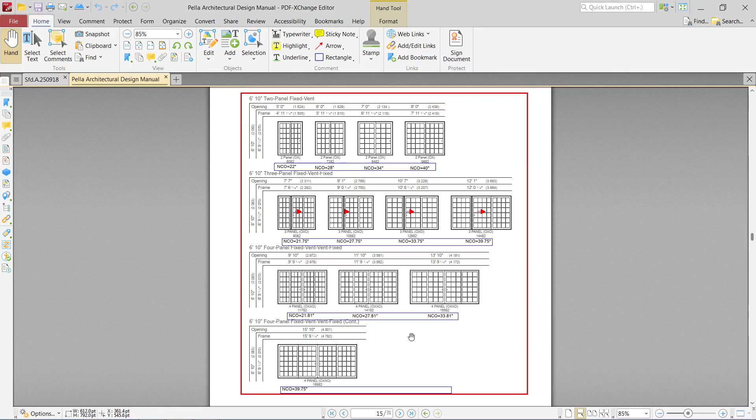So I ran with a 3-panel door, but one of the first things I discovered when I started trying to put the drawings together is that we weren't going to be able to support this end of that big ridge beam the way we were in the past, because in the past we had an attic to go into and we were building a new wall and etc. Now it has to come into this existing second floor wall, and then its bearing has to come down through here, because I tested it and it can't bear on just a couple joists up there.

That point load of about 5,000 has to be carried all the way down to the header across the new doorway, presumably if that doorway is put in, and I can't imagine it's not. So when that doorway is cut, you have to cut wider on each side by 4 inches or so that you can put in 3.5-inch blocking for these beams.

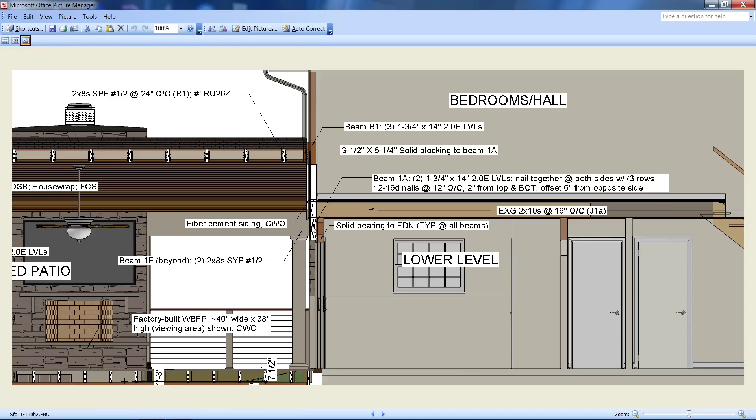Now originally I was showing this as 2 14s, but when I began to see this alignment here, I wanted to hopefully use it. I'm using the shorter Pella door, which is only 6 foot 9.5 inches tall. And so 2 14s or 3 11s, it's a little bit more expensive to use 3 11 1/4s, but that's what I did.

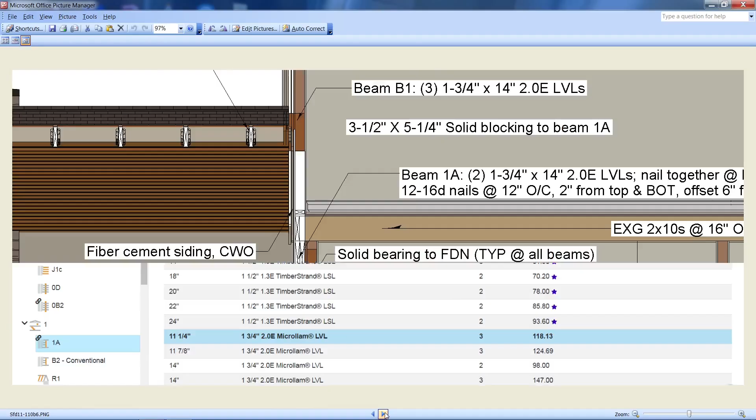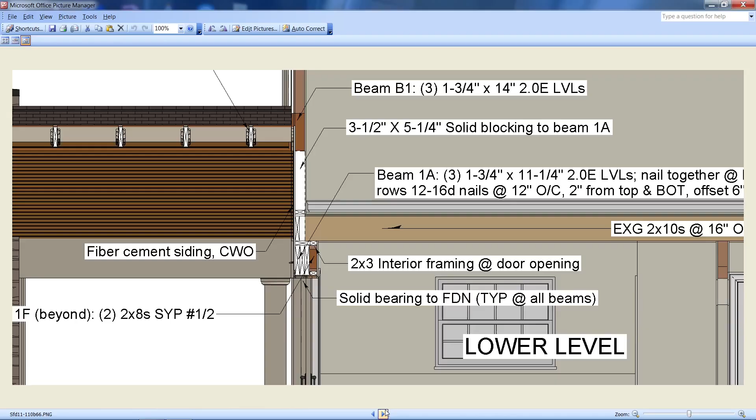I shifted those to 3 11 1/4s, and those will go out, and then outside that door gets cased on the outside as well, because it doesn't fit back in there. I mean, you might be able to do any number of creative things in terms of how to accommodate that out there. But this is how I did it.

You're probably not going to have this brick across here because you have to put a new lintel in. It doesn't matter, because we need our beam in this region here where this brick is. So one way or another, that has to be accommodated, and that is a start, but we need that framed all the way down so that we can put those 3 11 1/4s in there.

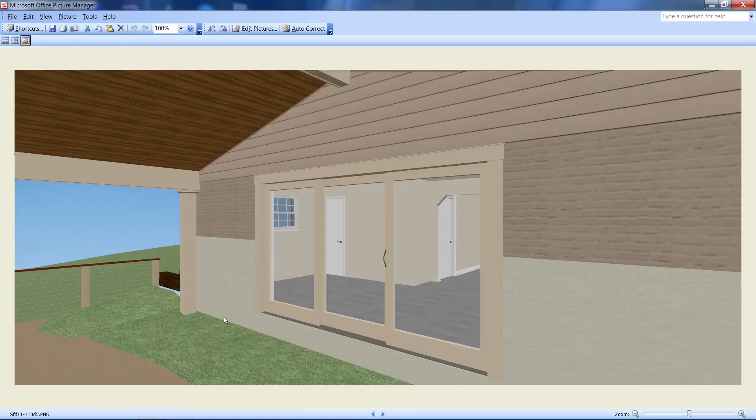Next, this is when I was still thinking I was going to be able to lower this down 2 stairs. I had just started on this without knowing what was going to happen, and I put this bit here together first, but then I began to think about lowering this and recognized it just wasn't going to be possible since we were no longer coming out southward 10 feet. And even here, I've scraped this ground away, and I'm not sure you can even do that. Yeah, you can see I've scraped that ground away.

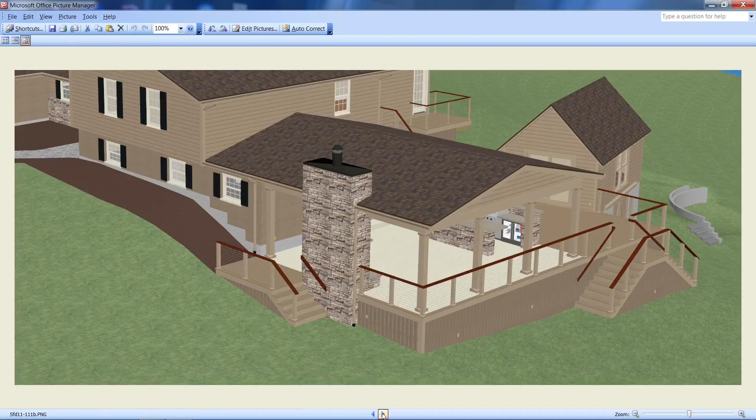Right now, over by the door, this ground is up level with the door. So even to put this deck level with the door, some of that ground needs scraped away. Or you can put your framing in and then refill it if you wanted to. It's all ground contact lumber. And that was where we were the last time. Step downs, 7.5, 2 step downs. I'm just looking at this right here. This is your floor surface in here.

And if the dirt was up to that surface, and it is at the back wall right now, I don't have a lot of reason to expect that they would build that rear foundation wall any deeper than they needed to. I'm showing it 2'8", but they might have only built the bare minimum 3 courses back here. So if somebody wants to check that, it would give you a good heads up on what's going to happen.

But right away, regardless of that, I knew that we're not going to be able to come down that far. If you wanted to come down those 2 steps, you would have to undercut that rear foundation wall and put in some sort of piering like this at some specified interval.

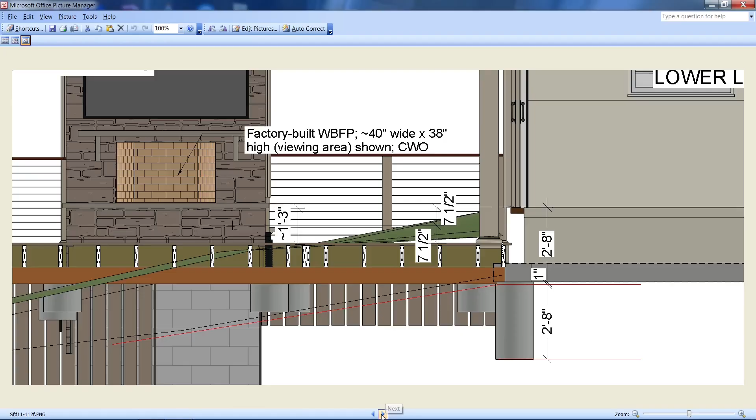And here was the plan last time when the railing was still outside. And this was a good idea and a sensible one, of course, to move that inside. And I really liked that. And I didn't like that much. I mean, this was tolerable when it was that, but I still was not thrilled about it. This does make that skirting easier. Okay, so we don't have to fasten that skirting to a concrete wall.

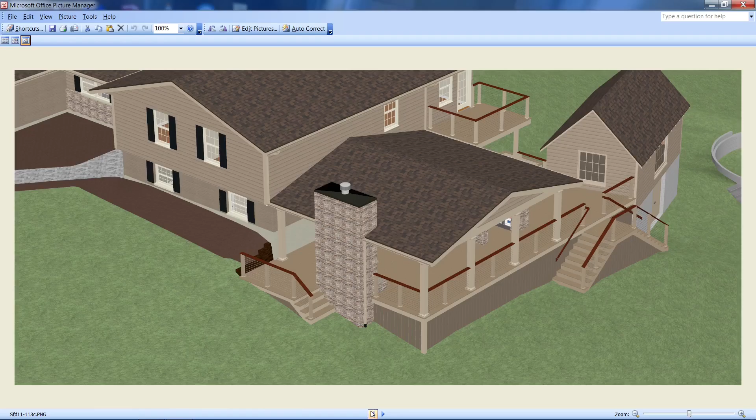And the railings, I've left these like this. And one thing, you might have to come out a little further than this because they want at least an inch, I think, maybe even a little bit more than that, behind that railing for this obstruction, maybe a couple deck boards. These are just those hollow aluminum or stainless steel tubes with the fasteners going through it.

Now all of this railing that I'm showing, you can either put those newels together yourselves with framing coming up through here with 4x4 and a sleeve, but this is a 5/4 by 6 on top of it, or you can get something from a manufacturer to do all that.

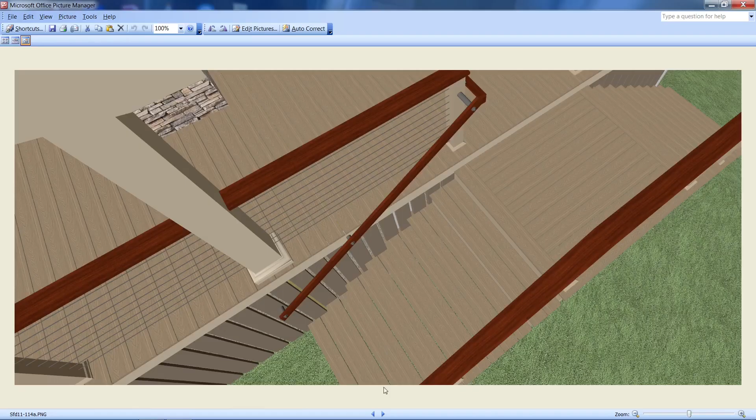Okay, so at that point, once I had that deck raised up the extra 2 risers that it absolutely needed to go up, this started to look like this. And then I went down a whole path, and the construction drawings are based on what I ended up with at the end of all of these slides, because I followed a number of pathways. And I guess the first thing I did though is this is too far. This is 5.5, almost 6 foot, which is too far to stretch those cable rails.

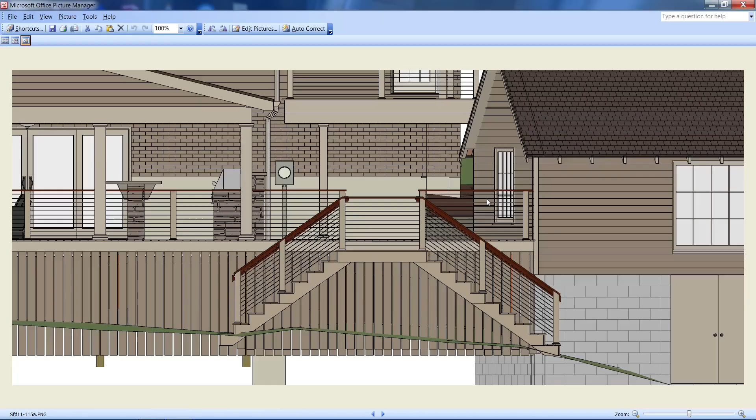So the first thing I did, I moved that back to the west, so we were able to put an extra newel in here and get that where it needed to be to hold that. And this one now is the same distance from that, so I kind of like that. We still have this column here, and that's what I began to mess around with, I believe, as I went forward.

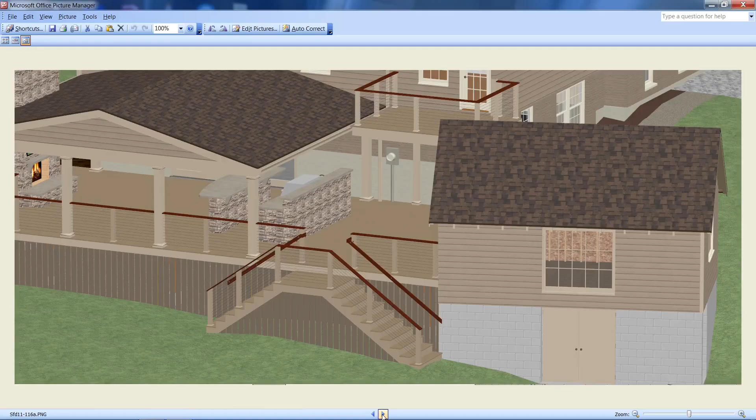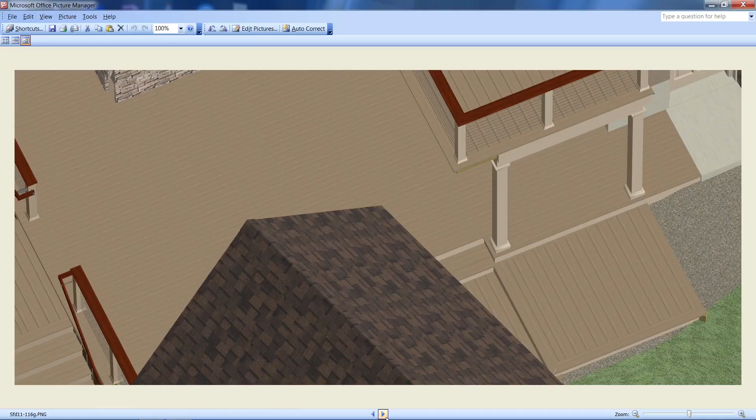Leaving that alone for a minute though, this was how it was the last time. This is a 2nd floor deck, and this is how I had this, where this was a wall or a railing across here. And maybe that still makes the best sense, but I did what I could to make this a different sort of situation than that. So you step down from either of these places then, and I'm not sure how this is all finished out in the plans. It's finished a little different than that.

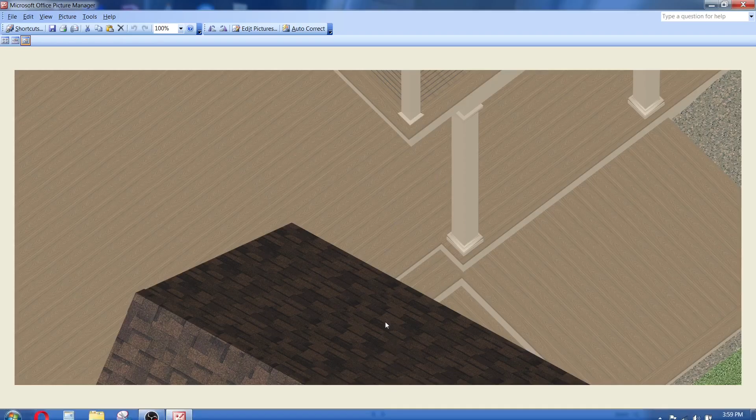The main thing is this column has to stay, it's necessary, as does that one there. But these ones on this side don't necessarily have to stay there. And that's the beamwork now. And I tested what it would take to just bring that beam across so that we could get rid of that front column at least. That's where I began, is getting rid of that front column.

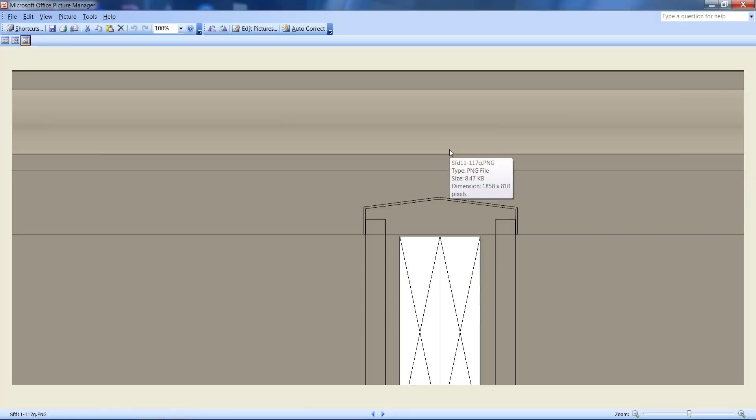And where it comes across there, there's this little detail of flashing. It's only about 8 inches long, and it comes in under the gutter and over whatever that beam ends up going over to there. However, this beam can only be 9¼ inches tall max, because it begins to intrude on the gutter, and you can see that the roof can't go up any further. So no matter what happens, that has to be a maximum of 9¼ high. It doesn't matter that you can move this deck up. The problem is right here, getting under this and attaching to this.

But I designed a couple things with that 9¼ inch height, the only way I was able to do that with regular conventional lumber and not LVLs. When you go to an LVL, you could probably just use standard LVLs because there's just so little exposure, but you would have to somehow flash off the top of that underneath those joists. And that's probably possible too. But otherwise, you could use an exterior LVL, which they make.

But I tried to keep everything just using conventional lumber, and that means a couple 2x10s, which meant I had to reduce both how big this deck projected forward and what the loading was on that. Now if you use the LVLs, I reduced it down, but if you wanted it larger, it can go back up if you go to the LVLs for these beams that carry across. And that's if you agree with this idea of eliminating these extra columns here on the interior.

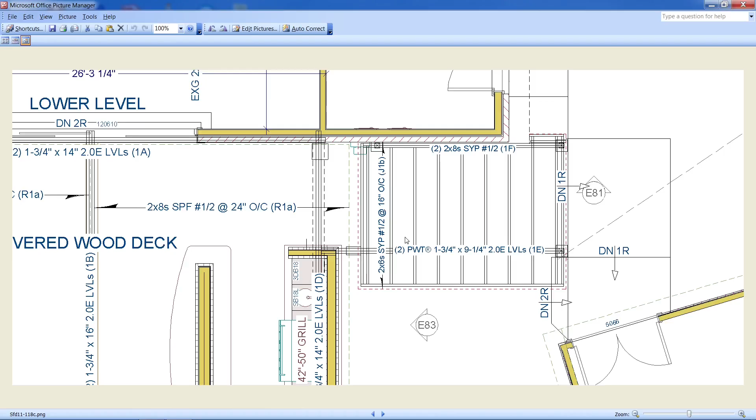These are the pressure treated. If I load this at 40 pounds per square foot, and I have to say if you have stairs coming down here, then it will be necessary to have this rated at 40 pounds per square foot, is my guess, because it's accessible like that. If it's inaccessible, I was pretty sure I can get away with just having the loading at 30 pounds per square foot. And so that's what I did in order to get where I went, which was a couple 2x8s on each side of those.

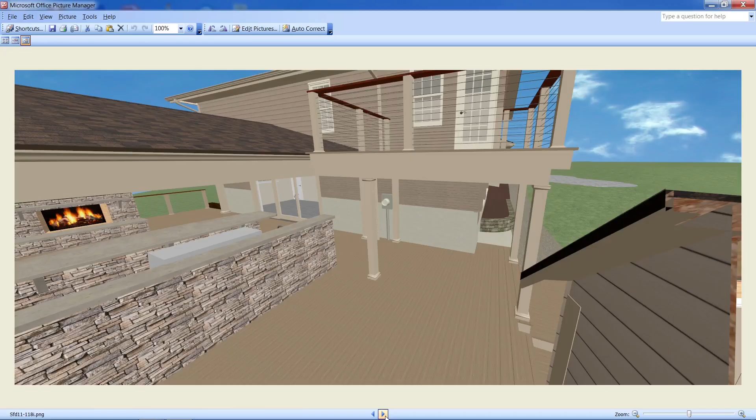This is how, when I just took out the front one and just had that going through, and I don't know if that's bothersome or not. I felt like the column was a little more bothersome than this. Particularly, as I said, I'll try not to forget various things I was thinking of when I went through this. So there they both are, this one and that one. And I knew I could get rid of that front one with this here, and I can get rid of the back one as well.

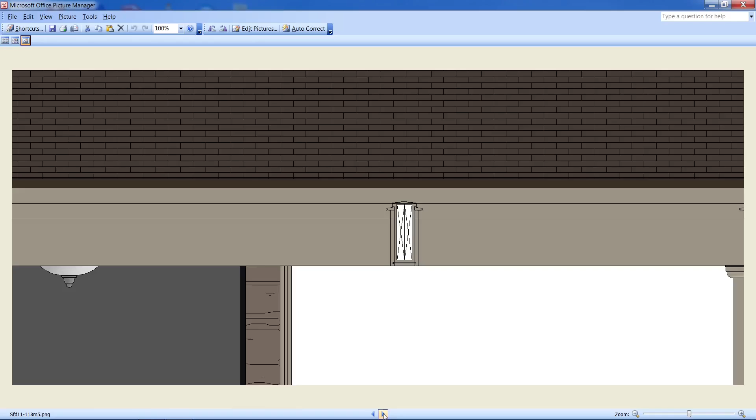Looking from this side, taking some of these out, and then you can see the overhang here is that big 2-foot overhang. And that was fine when we had our own columns at this end. But if we want to do this where we hang this column on this beam here, then that overhang can't be that large, or we're going to use LVLs. But that takes out both those close ones and just has two big beams coming back to the main LVL. And that's the detail there, and you can see it was a little too tall to fit the gutter, so some special arrangements had to be made there.

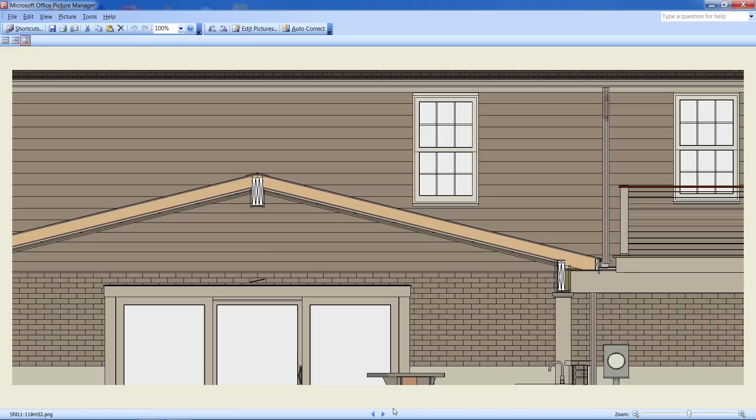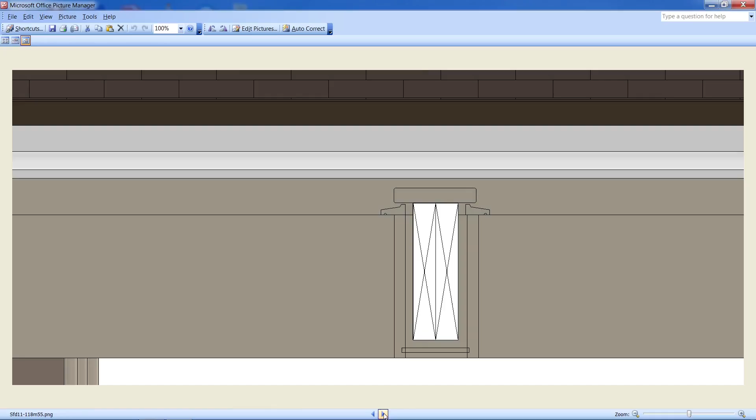This is 11¼ inch fascia board here, and it just has to get cut out down through here to allow for this flashing, etc. And I kind of did something like this. This is the gutter up here, I believe. Yeah. This was one of the flashing details I worked out for that little 8-inch section, just standard drip edge, and one by and then flashing on top of it. But you can almost just use a decking board for that matter. You can almost see it here, right here. And that's that drip edge and decking board.

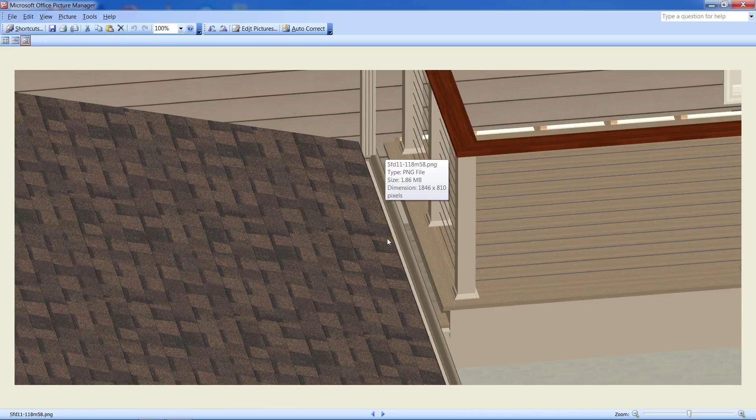Now, this is kind of a game of inches, because this downspout has to come down from that second floor gutter here, and then when that beam at the back comes through, the downspout that comes off of this gutter here has to get to the left to miss that gas or that electric meter that's down below. But there's plenty of room for that to be done in behind this bit here.

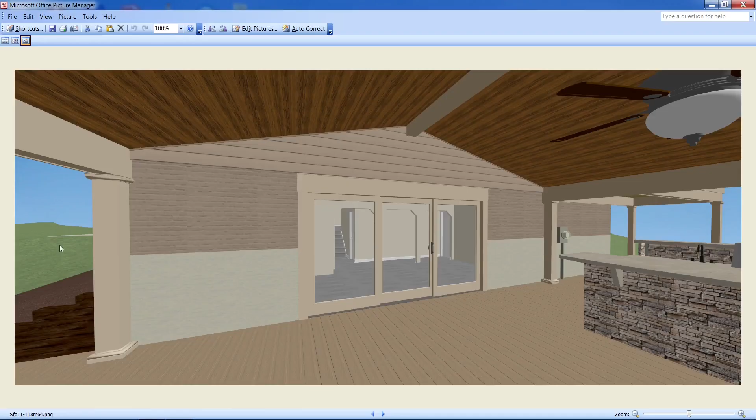And those two could be totally eliminated. They're not, because these beams here that are carrying, I have those penetrating into the house and bearing on the house framing inside. So these ones don't need to be there, but then you lose some of your symmetry looking at the fireplace for sure.

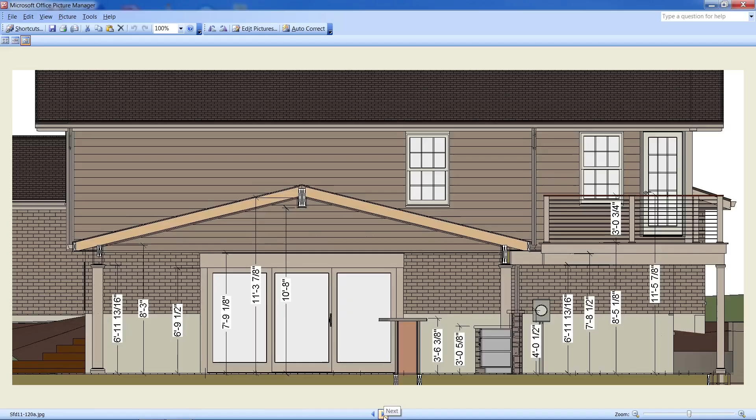Out here I looked at this and I knew I was going to have to build regular foundation for this bit here. I didn't think there was going to be a way to do that with just wood framing all the way down through the foundation. So that changed around and I put a regular 8-inch CMU foundation. You could probably build it out of 6-inch CMU, but I built it out of 8. Well, the mud sill plus the CMU wall came up to the bottom of the new deck floor joists, and those floor joists went across there. This was just some dimensions for you to reference at some point. Some of that's going to be in the drawing anyway.

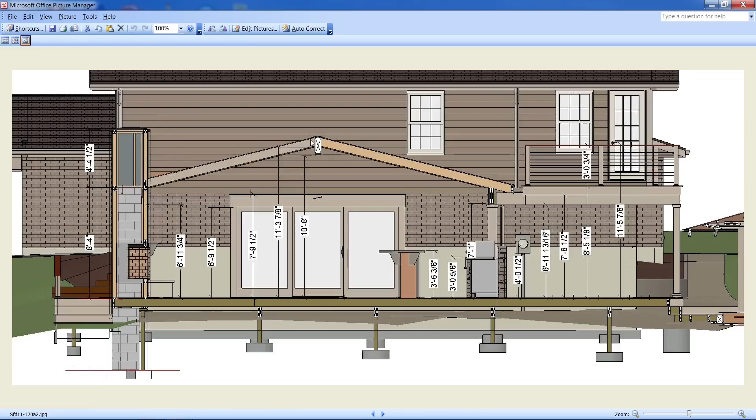Where this chimney is, I've built this chimney in 2 stages. Maybe you put plywood down first or whatever, but I have the framing built right on the deck framing, and then coming up 8'4", and you really can't come up 8'4½", so you got to cut the 2x4s. Coming up 8'4", and then building the second section 4'4½" on top of that, with these studs just coming down between these rafters. So that's that area there. And you see what I finally ended up doing is using a big lintel on this door here, with the new Hardie siding coming down to the top of that drip edge on that.

Because the door can't go any taller, but we definitely have to cover up to that siding. And this had been a tall 14 or 16-inch piece of like MiraTEC up here, but if you were using more conventional sizes, what I end up showing is a 1x12 and a 5/4 by 4.

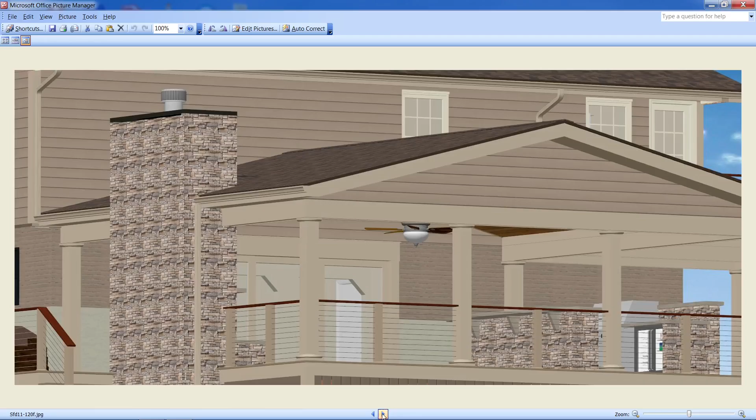And this is the view from that side. I guess we go through a few things here. I like these. This is kind of what the step down would be. I think is the best we're going to get with that. Then I continue to carry this through, and there's my other looks. Hopefully this is the right photograph numbers.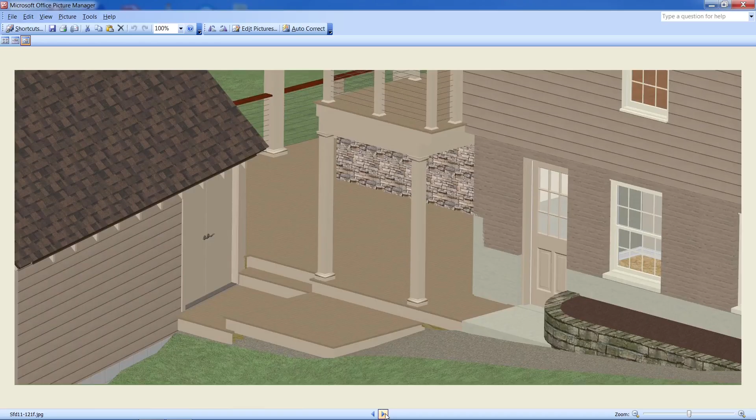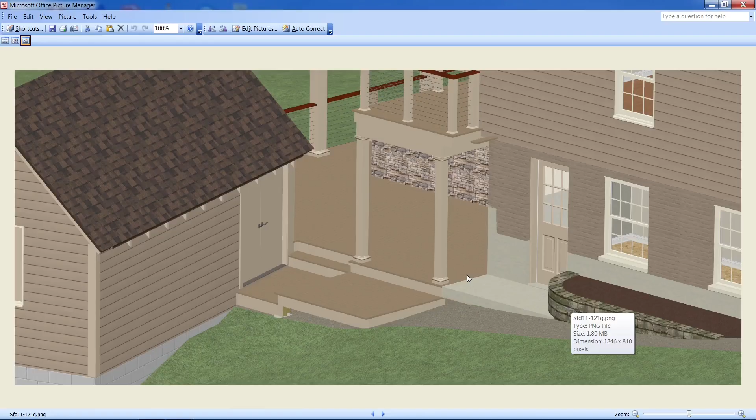So over here, you know, this grade comes up so high that I just have those piers coming up, and the framing is bearing directly on the piers. And you can see what's happening there. So that's when I just bring that concrete sidewalk all the way forward to that decking. There's how I put together the framing for that.

This is kind of the roof beams. These are the flanking beams. These are just the 2x8 pairs here, and the LVLs at the top, and the big 2 14-inch LVLs here. This middle one, which has a post that goes up, or framing that goes up to support this, same at this end. This middle one I have going to the outside of that 4x4 for full 3.5 inches bearing.

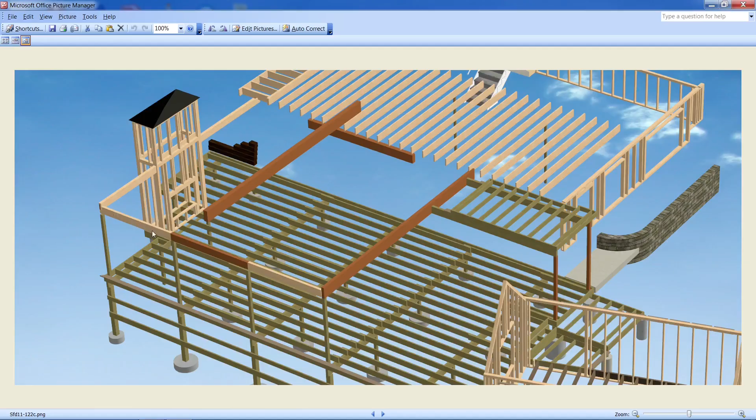And then these things here are only carrying nothingness, and so those could be box beams, or I show them hanging with concealed flange hangers at each end on either this or the column, as far as that goes. On this end here with these 2x8s, that column would actually come all the way up to the bottom of the 2x8s that go that way, and then these 2x10s are suspended on that interface.

And the same thing happens with, I changed all those upper columns from 6x6 to 4x4, so that we can just attach those to each of our beams, or just get an attachment to that.

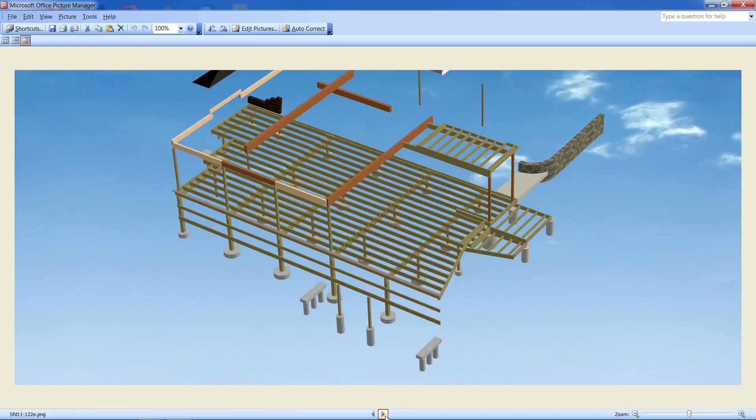These are horizontals. I show a 2x8 horizontal and a 2x6 horizontal to carry that vertical skirting, if that's what you end up doing. But there's how many holes you have. I suppose these could be a couple 12s instead of 3 9s. And there were so many different sizes I had no choice but to just label them on the plan.

And all the ones back against the wall, this is a 12 at the end, but all these ones at the back are 16s. And then most of the others are 24s. Except these two middle ones down here are 28s, and I still haven't figured out how to make that any less than that.

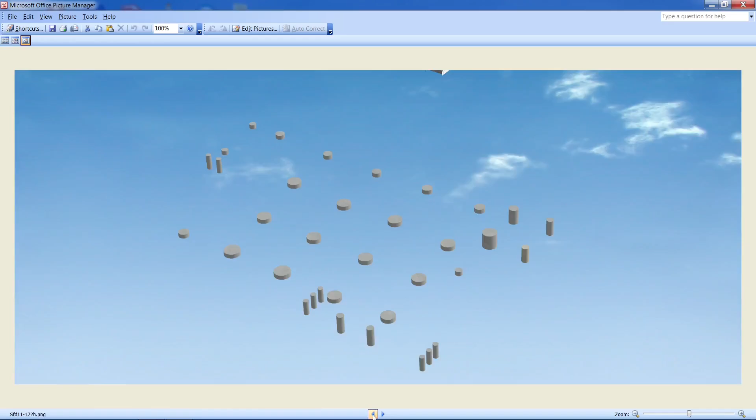And I'm not sure what this file was. I'll probably put that together and see what it is and include it. If not, though, I wanted to show you a few other things.

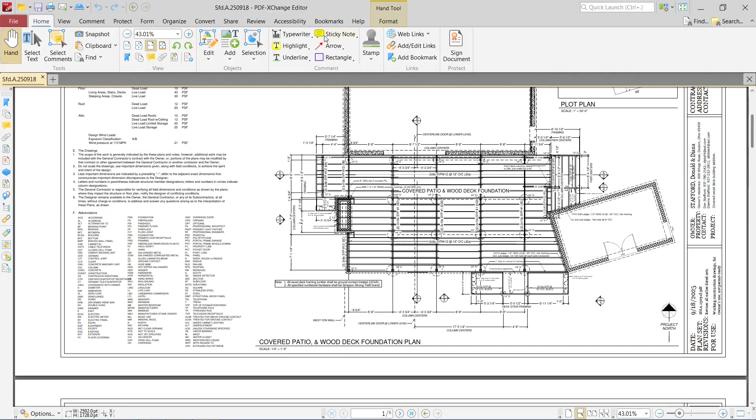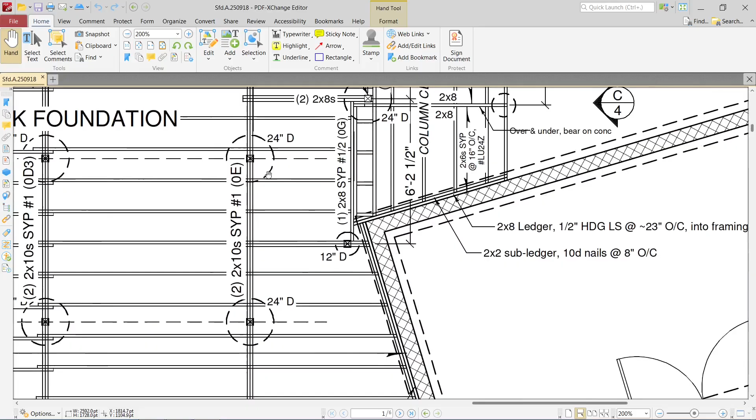I wanted to say that I left this all the same, but it is rather a game of inches here, and this is going to have to be mapped out for sure so that we know this is true, because you can see how close it is down here. And I suppose it's not the end of the world if it's this way or that way, but it's just something to keep in mind. The same thing applies for how it all actually comes together at the corner with this stair, because we can't be absolutely positive of that yet.

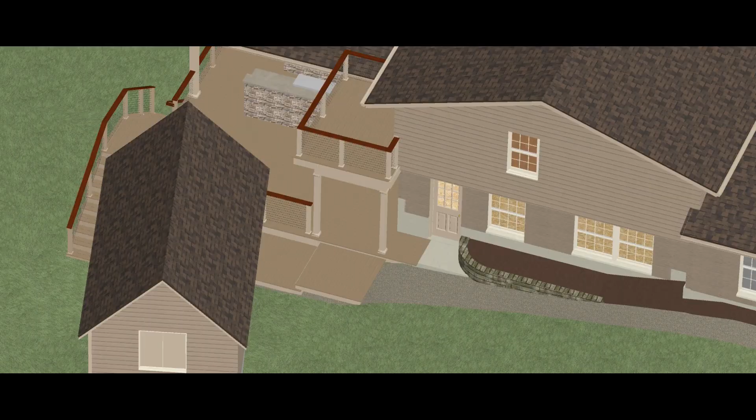And this was apparently a turnaround that I had made when all of those little columns were still in place. And they are fine to me to be staying in place when I look at them this way as well. And maybe there'll be a short turnaround with those gone.

One quick thing I want to say that occurred to me during making this film, I think I'd be remiss if I didn't say so, is with regard to this door. Now that this space has become less high, I'd like to have that door as high as possible, but of course we're limited by this header. But now that we're cutting this wall, so we have bearing all the way over and all through the whole thickness of that 8-inch wall, it is possible to move that header up into the wall.

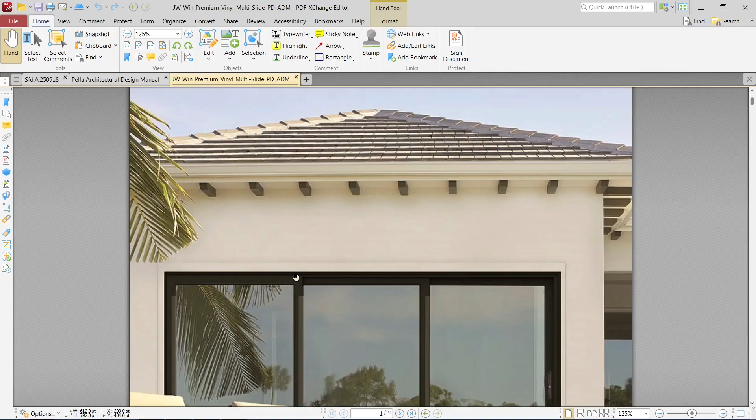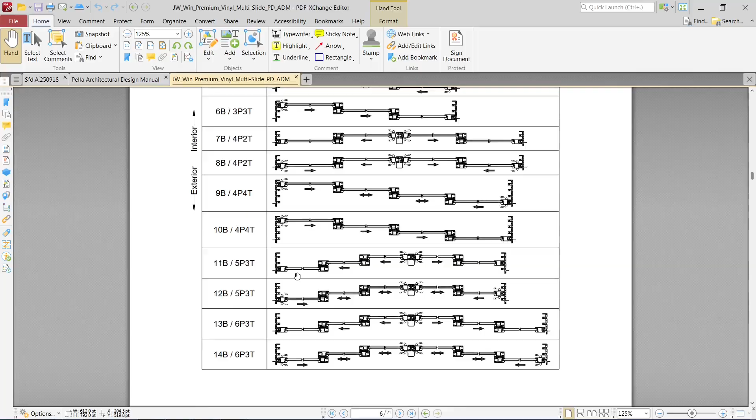Now this was Pella's standard size, but that led me to look at some other sizing alternatives. Pella makes a 6'10" and then an 8 foot, and I was hoping somebody made a 90, and I think some of these people just make whatever size you want. And you can see that there's a whole variety of different things that can be done with that opening, including folding doors and all of this sort of thing.

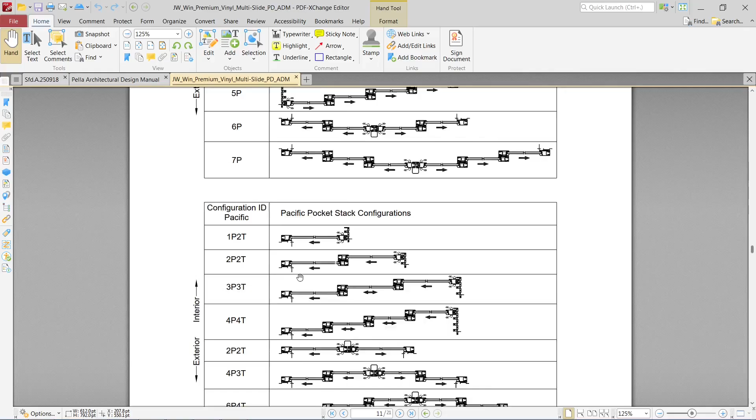See if they have any. They're just various pocket and stack configurations and sliding back like this, and we have the whole thickness of that wall to work with. So that header that has to go over there to hold up the end of this beam can go up into the wall, and it was already sized to hold these as well. So where it's located doesn't matter. So I have it pushed up into the wall.

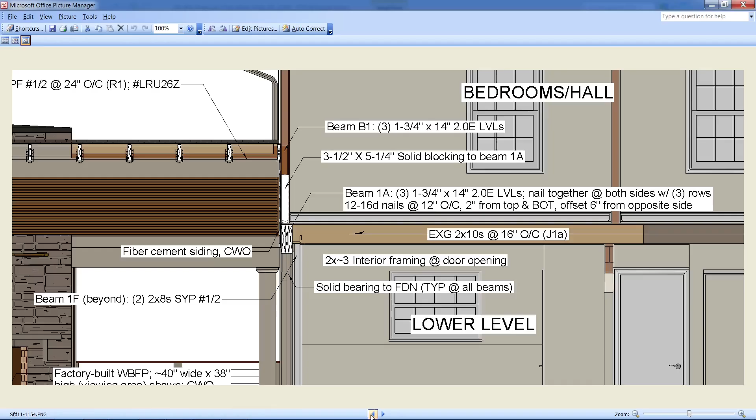And really, a person may as well do that if they can get a higher door. And so I don't know, that probably bears some looking at. And this is Jeld-Wen's all vinyl, which is not the most expensive line. For example, I'm pretty sure there's at least one or two manufacturers that make standard sizes in 90 inches or 92 inches.

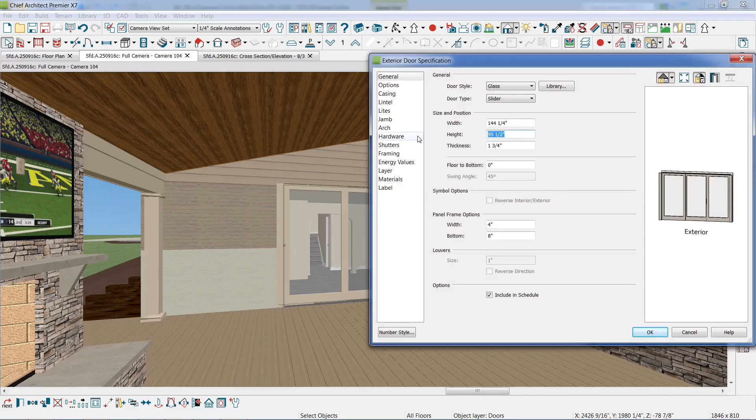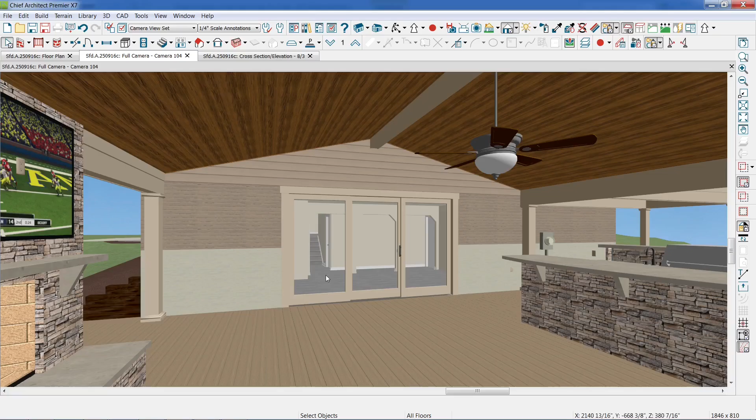And this is that 8-foot Pella. But if you could get it in, say, that's 88 inches high there. If you just told them what size you wanted, this one's 88 inches high, which makes a pretty big difference from that. Definitely makes a big difference, depending on what you want to do there. But those beams will handle anything that you want to do in this opening up to 12 feet wide.

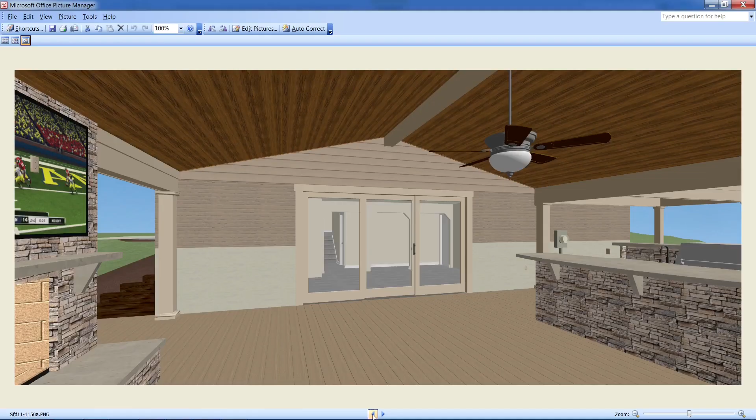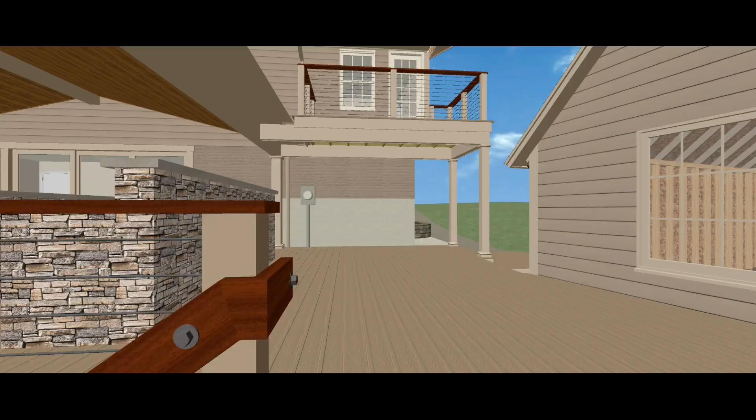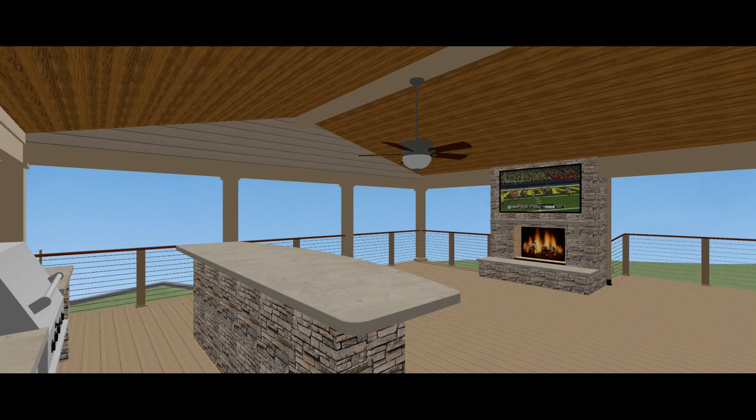Alright, that's it for that. This is a walkthrough as well. And I'm not going to make a lot of commentary during this, except to note that once we bring down that ceiling and that beam, those big 8-inch columns, once I reduced those to 4x4s, which is all that was necessary, I would like to see those columns also done in that smaller size. Right now they're showing 7 or 8 inches, and I would like to see those at the small size, which would be 3.5 inches. But I didn't show that simply because that gets so short between there.

I also contemplated treating this space between once I had gotten this set up like this. I knew that was going to be a sunny area anyway, and I wanted to see if there was some way to join that area with the other. And the way it worked out, this beam that has been showing through this film, I mirror another one at the end of that bar the same way, and I just finish building this pergola structure, which can be of any kind of material. It gives you a place to hang things up and kind of unifies these spaces.

And the way it works out, this beam here, when it's symmetrical with that bar area, with that whole cooking area, dives straight into dead center of this shed, if I've got that shed right. But I did want to show a little bit of that to get an idea for the future, because if we're going to think of something like this, we have to make sure that these beams are heavy enough. And finally, if we add stairs to this, this has to go up in its loading, so there's going to be LVLs involved or something else.

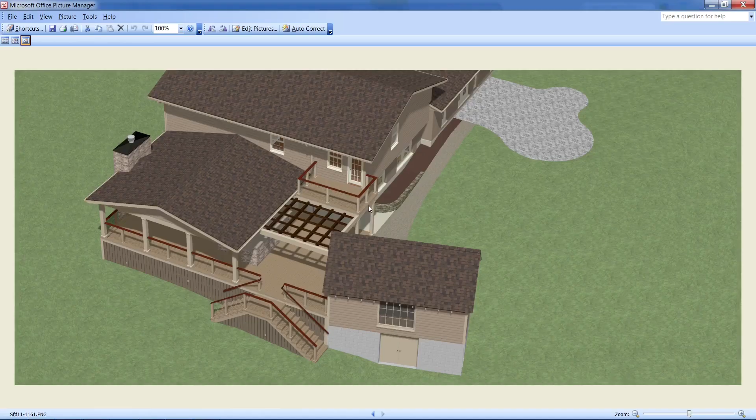But at this point, if I was going to put a structure of some type like this, I would endeavor to bring my stairs out this way. I don't think I'm going to be able to bring them out and then get you back down low enough to come underneath this bit here. So I think you have to come down almost facing the shed door. But I haven't even looked at that because I want to see where we are now.